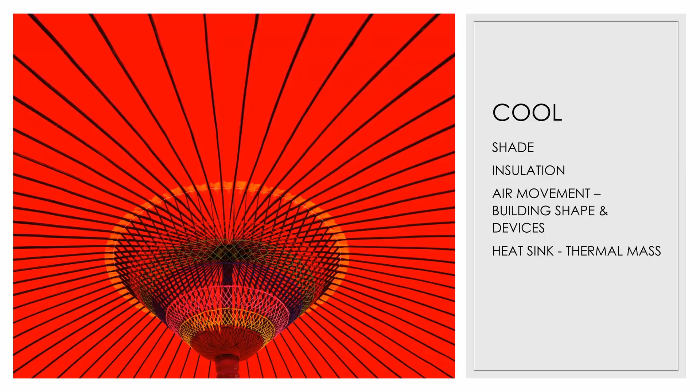So how do we create warmth? How do we make a space warm? We can use energy from nature, but actually our bodies create a lot of warmth. So if you are cold right now, the fastest way to get warm is to insulate your body, put some more clothing on. We can reduce the amount of air movement because we know when air moves, it cools down. And we can insulate the building so the warmth is not lost. The buildings need to stay watertight, and by being watertight, we have more control over the temperature.

So if you are sitting in a very, very hot building right now and you have enough water, you can hose or mist the roof. That's a quick way to cool the building. Open all the windows and doors and put fans on to get the hot air moving. In winter in particular, we don't want to have water in the building or even underneath the building. If you suspect that water is flowing under the building, it can cause mold, but it can also cause the building to get cooler.

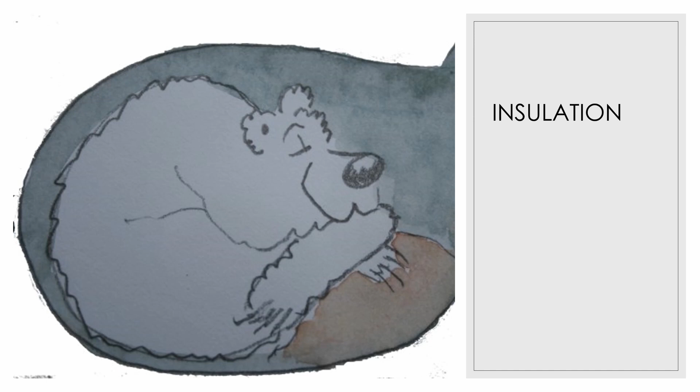So let's have a look at insulation. There are many creatures in this world that use insulation, like the bear in a cave, and the fur on its skin, and the sheep with its wool. But when we look at the elephant, it uses its ears to cool down. It fans those gigantic ears to cool its body. But if it was in the snow, then it would benefit from insulation on those ears because they would be very cold. The ears are like thermal bridges.

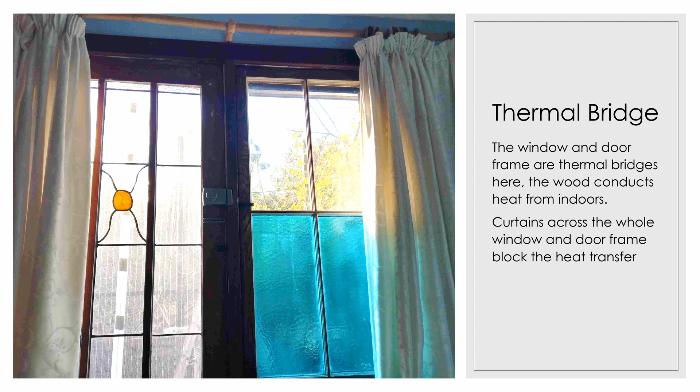They move the heat from the elephant's body out into the air. So if you have a doorway or a window that has a wooden lintel right through from the inside to the outside, that is a thermal bridge. When we cover the thermal bridge, we're reducing the heat loss or the heat transfer from inside.

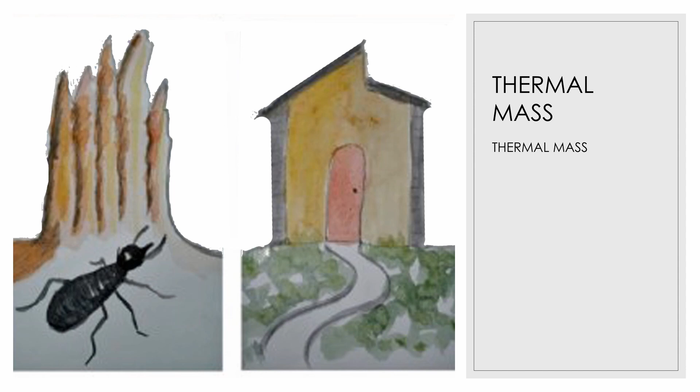Thermal mass is usually a bulky material like mud, boulders, or even water tanks. A brick floor or a wall can act as a thermal mass. In many ways, it's the opposite to insulation because insulation is usually light and airy, using the trapped air to block the transfer of heat. However, wood can act as a thermal mass, but it can also act as insulation.

Some homes, especially underground homes and cave homes, don't need much thermal mass because the cave or the soil around it is the thermal mass. And we see evidence of ancient underground housing, as well as many modern underground houses that use the constant temperature of the earth.

Now, one of the most important aspects of building a design is its orientation, the way it greets the sun. Thousands of years ago, Socrates noticed that when the homes are facing the sun, the light can penetrate into the home. And if there's a portico on the front, that stops the hot summer sun from coming into the home. But in winter, the sun can still get through underneath the portico or the porch. So he suggested that we elevate this sunny side and lower the sunless side to block out winter winds.

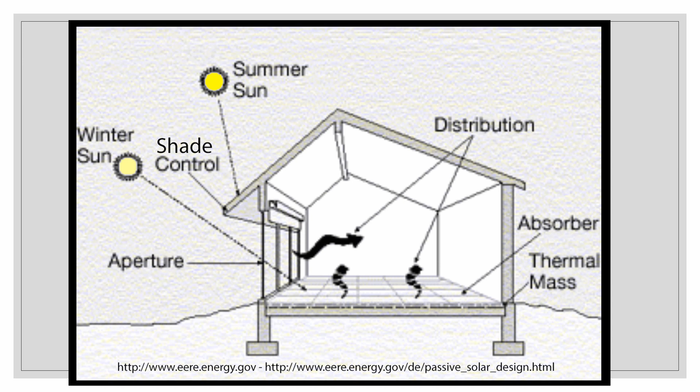That's the basis of solar passive design. It allows the sun to come in winter but not in summer because it has shade control on the sunny side and not many windows, if any, on the sunless side. But it also has thermal mass on the floor to absorb some of the energy during the day and release it at night in winter.

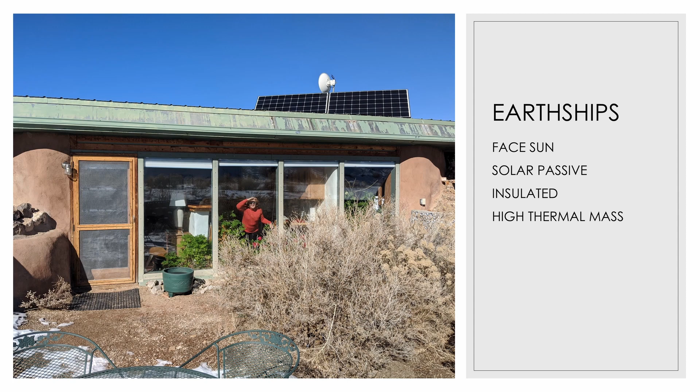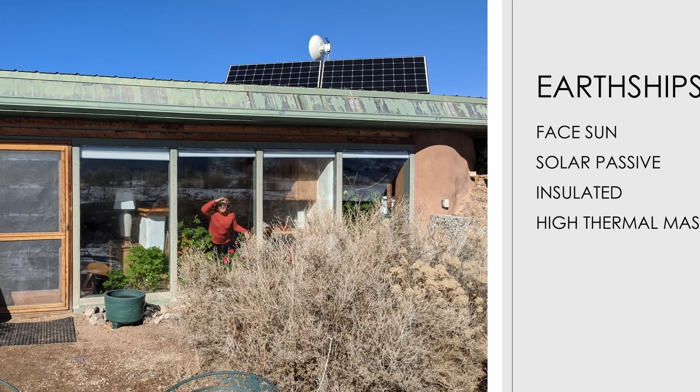Earthships are very similar. Here I am in an earthship in Taos, New Mexico, United States, and it is in the middle of winter. You can see some snow on the ground. There was no heating for this house, and you can see the sun is coming through onto a small dividing wall, which is a thermal mass, dividing the area between the kitchen and the living room. And you can also see a little bit further to the right, and a little bit screened for privacy, I imagine, is a large thermal mass in the bathroom.

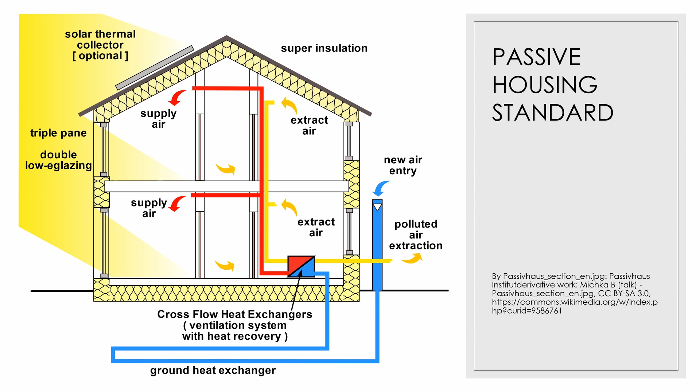The passive housing standard doesn't rely on sunlight, but you can have the same treatment on the sunny side. You can have your windows, but they tend to have triple or double glazing on all the windows because the whole passive house standard requires that it is super insulated. The thermal bridges are covered, and so there's very little chance of any exchange of energy, warmth from the inside to the out or vice versa. The colder your climate, the more that passive housing suits. It's useful also in a warmer climate that's subject to heat waves.

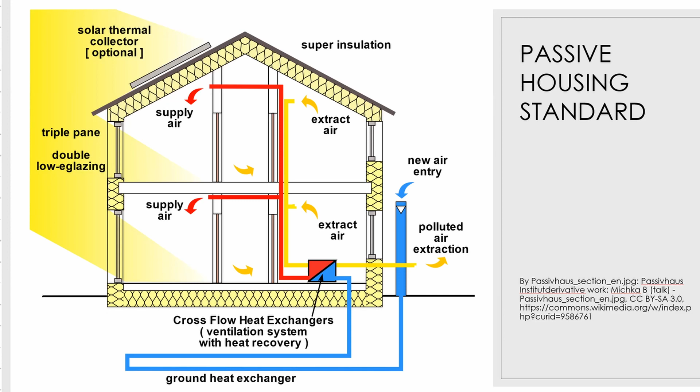The passive house is about really super heavy insulation and the ability to shut the building completely off the outside world and then really carefully regulate the airflow, the temperature movement across the wall. So we're probably going to need more and more houses that are resistant to heat waves. I like that it measures the actual built performance, because in Australia we've got this big gap between the theoretical performance and the stars that are awarded to a design compared to the actual built performance. And it is quite hard to measure whether the house really stands up, and Passive House is very clear on what the standards are and how you measure them.

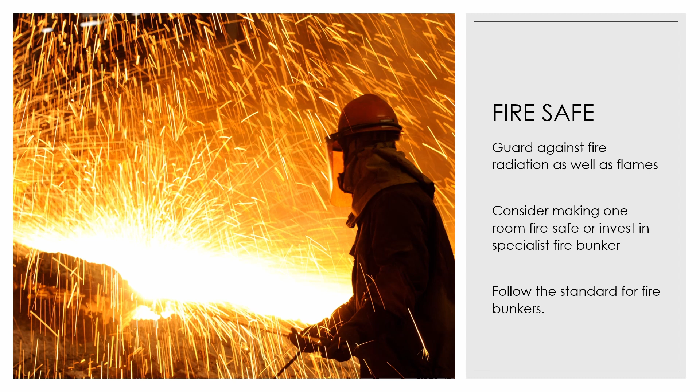There are a couple more things that make homes feel livable. Being secure includes being fire safe, and there is a standard for this. We need to determine if the building honestly meets the standard or make plans to escape. And chemical safety is a factor, especially if the homes are surrounded by pollution or have lead paint or have a long history of chemical use for pest control. In the building construction phase, we can choose to use physical barriers like a termite mesh instead of chemicals, but this is tricky to retrofit on established buildings.

Homes are more livable when they provide other functions, such as harvesting water, generating electricity, supporting indoor production by having sufficient natural light. And some buildings have really good outdoor spaces where we can work. They provide windbreak, frost protection, some reflected light, some shade, and of course the runoff water.

To design for the variation of the seasons and for climate change, use the angles of the sun to set up shade. Add thermal mass or phase change materials within the home. Add insulation, especially between the roof and the ceiling in that cavity. Block thermal bridges, such as window and door frames. Adjust the airflow. An increase in ventilation will be cooling, whereas when we block off rooms, divide the rooms, it makes them snug and warm.